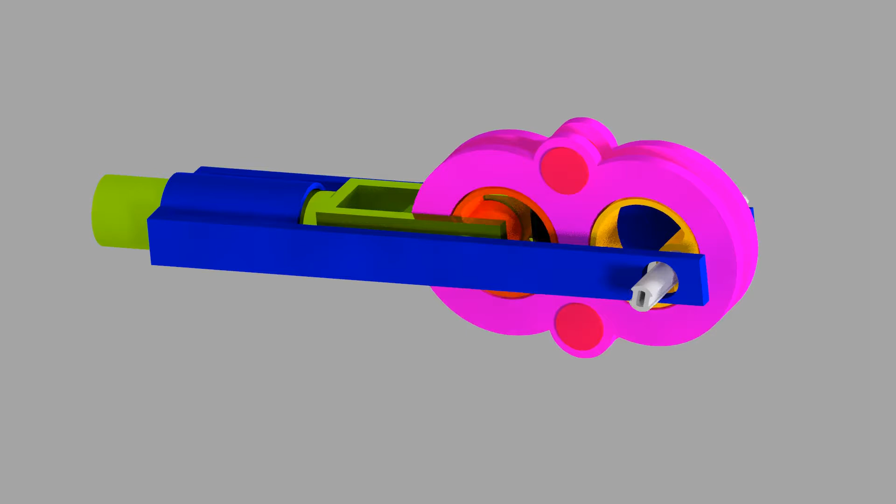This mechanism uses two spur gears to drive a piston. The housing for the spur gears experiences rotary translational motion, while the piston itself produces reciprocating motion. You'll notice that the spur gears have identical teeth, and they both rely on an eccentric shaft in order to provide the motion conversion.

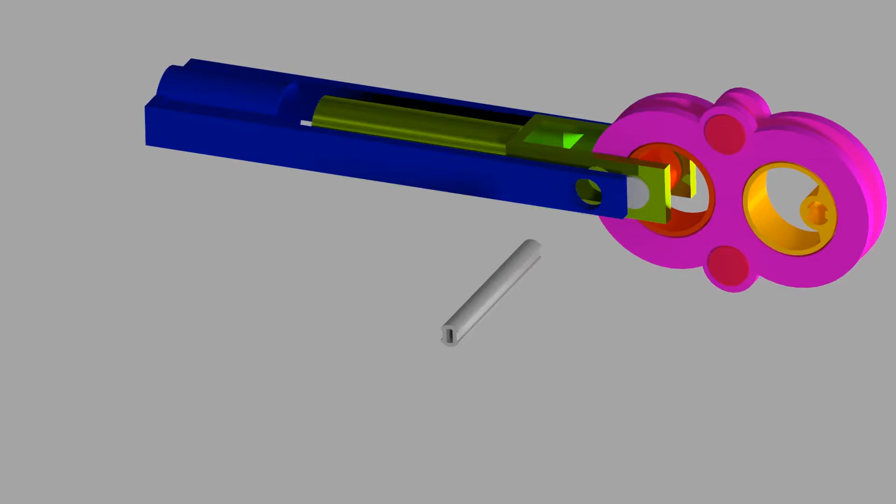This particular design does not work well when you try to apply force to the piston in order to try and turn the gears. There are dead points, and there's not enough inertia in the mechanism itself to continue that rotational energy. You'll notice that when we turn it by hand, it doesn't spin too freely. There's some play in here and some tolerances that are not exactly great, but it does function.

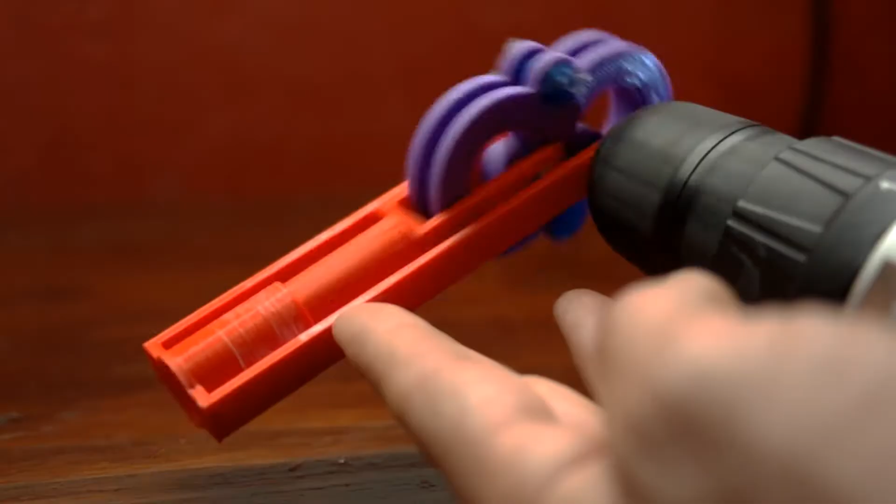When we put it into a drill, you'll notice that it works a whole lot better. You're noticing a whole lot of shaking, a whole lot of vibrations, and that's just normal, just part of the design. Here's a slow motion view. You can see that it shakes around quite a bit, but it also produces a very powerful motion into that piston.

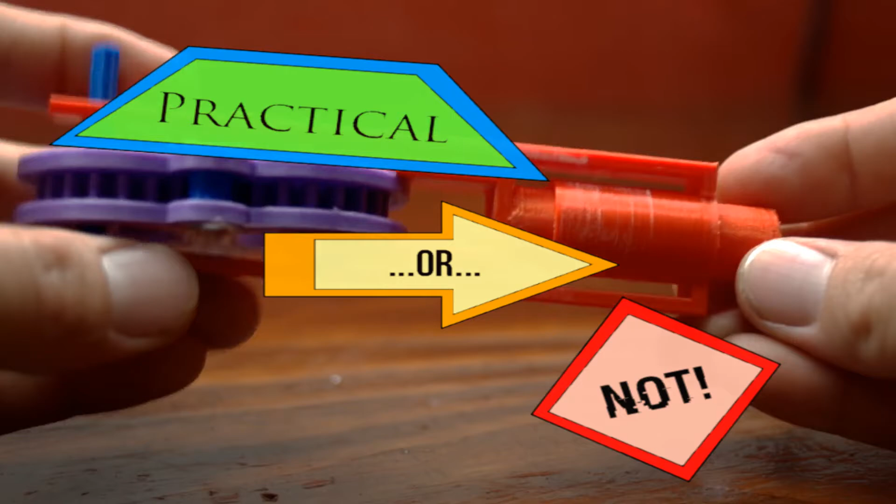So what I did is put this little piece of plastic in here and then just try to eject it out. And there it goes. It's pretty fun. So is this something that you can print? Is this something that you could use from a 3D printed standpoint? I'd say, yeah, you could. The applications for this are up to your imagination. Better design and better tolerances would yield much better results.

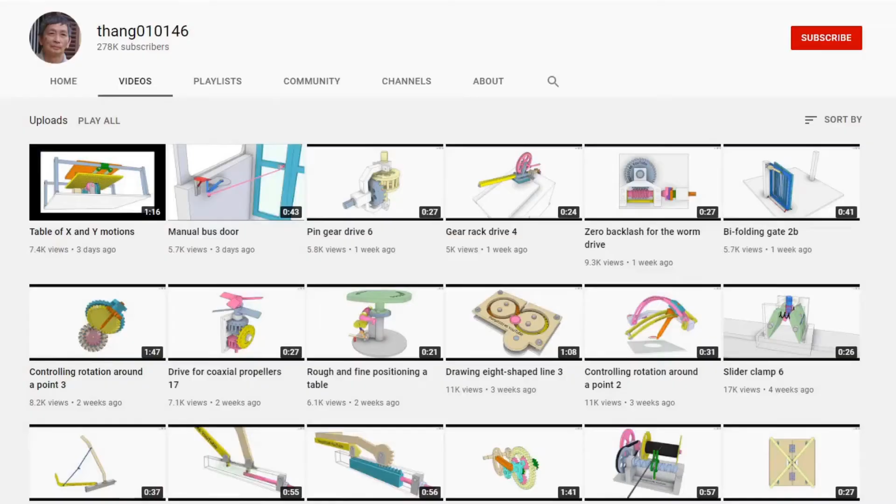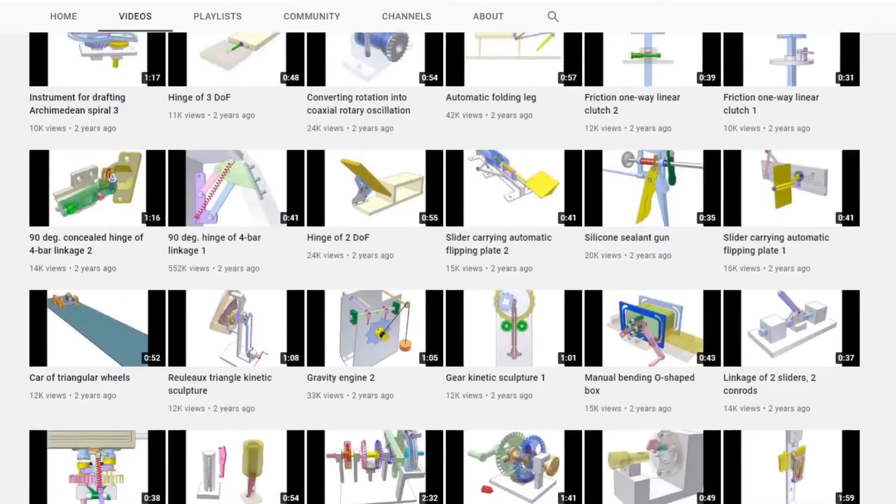I've been inspired to learn more about mechanical design by retired mechanical engineer and YouTuber Thang010146. His YouTube channel has over 3,000 mechanical animations that he created himself, and he's constantly creating new ones almost daily. I've been a fan for a while now, and I would like to challenge myself to recreate some of his designs and 3D print them to see how well they function out of a printer. He's a genius. You gotta check him out if you're interested.